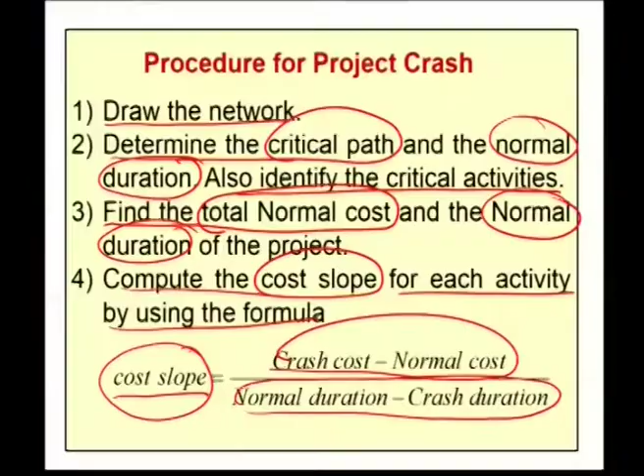The next step is compute the cost slope for each activity using the formula: cost slope equals crash cost minus normal cost, divided by normal duration minus crash duration. The next step is crash the critical activities of least cost slope first, to the maximum extent possible, so that the project duration is really reduced.

Once we identify the cost slope of each activity, we have to crash the critical activity which has the least cost slope to the maximum extent possible. The next step is calculate the new direct cost by cumulatively adding the cost of crashing to the current direct cost. Therefore, the total cost is new direct cost plus the current indirect cost. When the critical activities are crashed and the duration is reduced, other paths may also become critical.

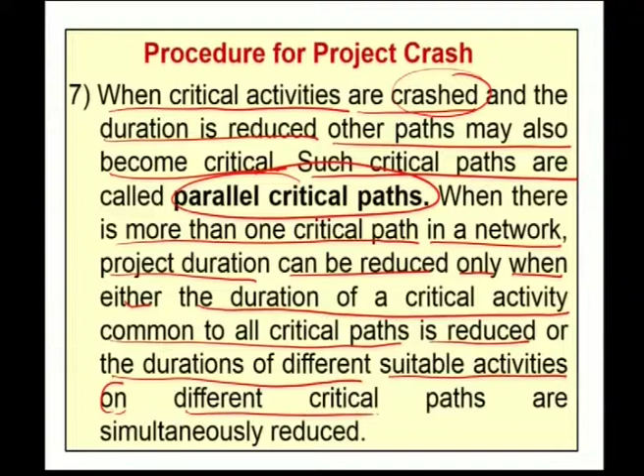So, in the process, when we crash one activity in a critical path, the other path may also become critical. Such critical paths are called parallel critical paths. When there is more than one critical path in a network, project duration can be reduced only when either the duration of the critical activity common to all critical paths is reduced or the durations of different suitable activities on different critical paths are simultaneously reduced.

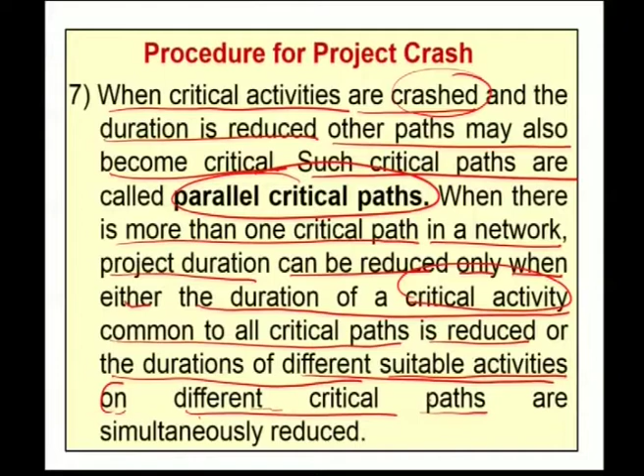So, whenever there is a parallel critical path, there are two ways we can crash the critical activity. One is, if any critical activity is common to the critical paths, then crash that activity. In the other case, we have to crash different suitable activities on different critical paths simultaneously. The final step in this procedure is to stop the process when the total cost is minimum. This gives the optimum schedule, called optimum duration or least cost duration.

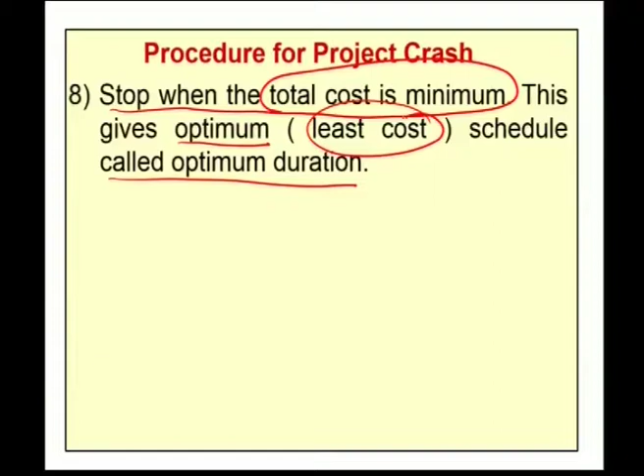So, by applying this procedure for project crashing, now we can solve a problem. The following data pertains to a project with normal time and crash time. There are jobs, activities 1-2, 1-3, 2-4, 2-5, 3-4, 4-5. For each activity, a normal time and normal cost are given, and a crash time and crash cost are given. So, the data involving jobs and their normal time, normal cost, crash time and crash cost is given.

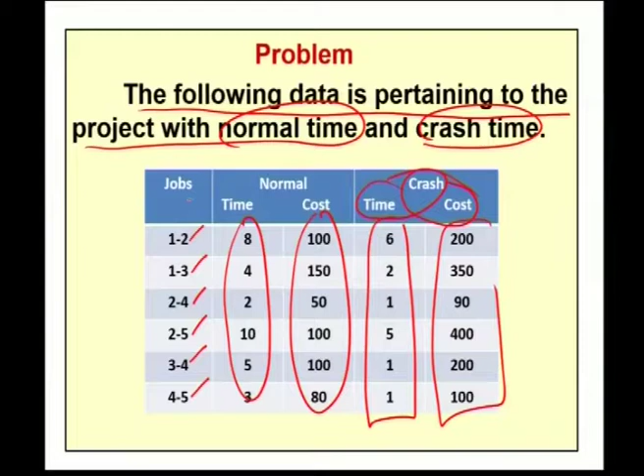Now, the question is, if the indirect cost is rupees 100 per day, find the least cost schedule, that is, find the optimum duration. The next question is, what is the minimum duration? So, a project in terms of activities whose normal time and normal cost, crash time and crash cost is given, and the indirect cost of 100 per day is given. With this, we are interested in finding the least cost schedule, that is optimum duration. We are also interested in finding the minimum duration.

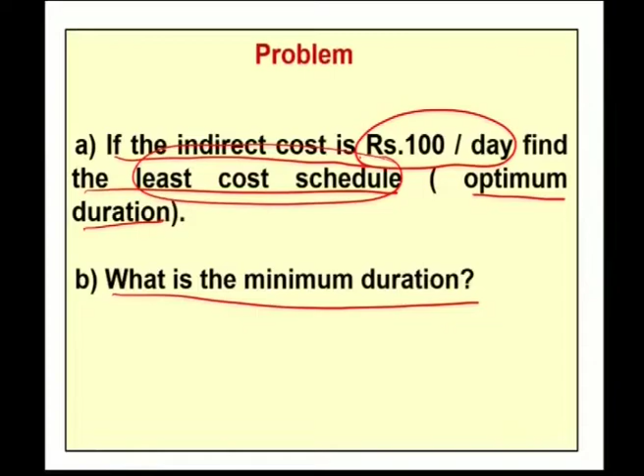Now, in order to obtain the least cost schedule or optimum duration, our first aim is to construct a network for the given problem. There is activity 1 to 3, activity 1 to 2, then 3 to 4, 2 to 4, then 2 to 5 and 4 to 5. By representing all these activities, we get the corresponding network, in which activity 1 to 3 takes 4 days, activity 1 to 2 takes 8 days, activity 3 to 4 takes 5 days, activity 2 to 4 takes 2 days, activity 2 to 5 takes 10 days and activity 4 to 5 takes 3 days.

From this, in order to obtain the critical path, for each and every node we have to compute the earliest starting time and latest finishing time. For node 1, the earliest starting time is 0 because the starting time of the project is 0. For node 3, the E value will be 4, and for node 2, the earliest starting time is 8, because node 2 has only one incoming activity, 1 to 2, which is 8. For node 4 there are two incoming activities, 3 to 4 and 2 to 4, so the earliest starting time is the maximum, 8 plus 2, 10. For the final node, using the similar technique, the earliest starting time is 8 plus 10, 18.

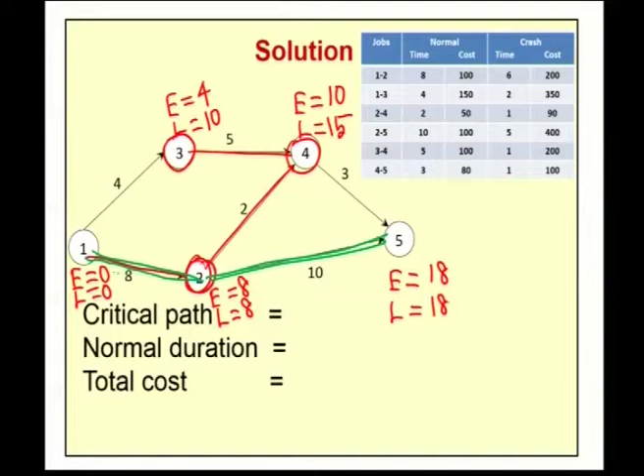The critical path is path 1 to 2 and 2 to 5, which takes 8 plus 10, 18 days. So for this problem, the critical path is 1 to 2 and 2 to 5, and the normal duration is 18 days.

Once we obtain the critical path for this problem, now we can find the total cost. Total cost is indirect cost plus direct cost. Now for this problem, the normal duration is 18 days. Per day the indirect cost is 100. Therefore indirect cost is 18 times 100, plus the direct cost is nothing but the total normal cost.

If we sum all this normal cost, the sum will be 580. Therefore the direct cost is 580. Therefore the total cost is 1800 plus 580, which is 2380. So rupees 2380 is the total cost for this problem. Now once we obtain the total cost for this problem, now we have to crash the critical activity.

In order to crash the critical activity, first our aim is we have to compute the cost slope for each and every activity. We know very well the cost slope formula is crash cost minus normal cost divided by normal duration minus crash duration. Now for the activity 1, 2, we try to compute the cost slope. For the activity 1, 2, the crash cost is 200, normal cost is 100.

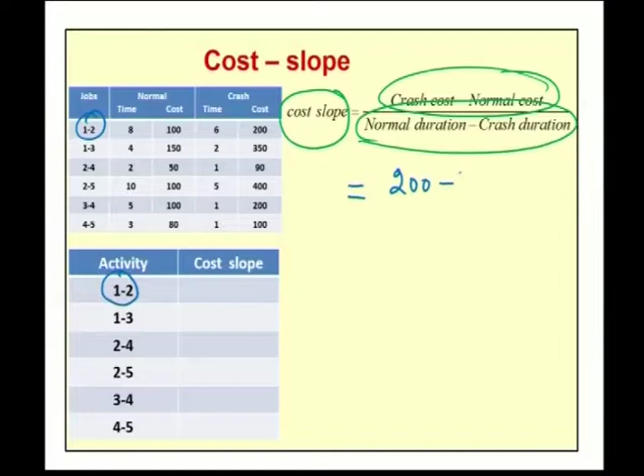So for the activity 1, 2, the cost slope is crash cost 200 minus normal cost 100 divided by, for the activity 1, 2, the normal duration is 8 days and the crash duration is 6 days. Therefore it is 8 minus 6. Therefore 100 by 2, which is 50. Therefore the cost slope for the activity 1, 2 is 50.

Next for the activity 1, 3, the cost slope is crash cost, which is 350, minus the normal cost, which is 150. So for the activity 1, 3, the cost slope is 350 minus 150 by the normal time, which is 4, minus the crash time, which is 2. So 4 minus 2. So which is 200 by 2, which is 100. So in the similar way, for each and every activity we can compute the cost slope.

Proceeding similarly, the cost slope for each and every activity. For the activity 1, 2, it is 50. For the activity 1, 3, it is 100. For the activity 2, 4, it is 40. For the activity 2, 5, it is 60. For the activity 3, 4, it is 25. For the final activity, it is 10. So by making use of this formula, we can compute the cost slope for each and every activity.

Once we obtain the cost slope, in order to crash the critical activity, next our aim is we have to look into the critical activity alone. In this problem, the critical activity is the activity 1, 2 and the activity 2, 5. Since our critical path is 1 to 2 and 2 to 5, the critical activity is 1, 2 and 2, 5. Among these two critical activities, the least cost slope value corresponds to 1, 2, which is 50.

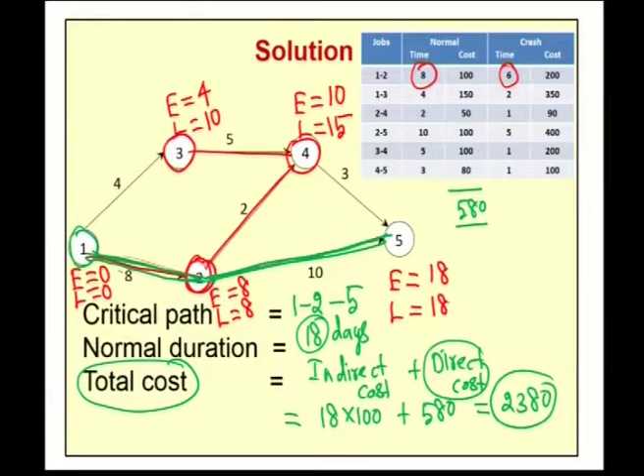From this, it is clear that now we have to crash this activity 1, 2 by 2 days. So, the activity 1, 2 should be crashed by 2 days. So, if we crash that activity 1, 2 by 2 days, then the activity 1, 2 assumes the normal duration as 8 minus 2, which is 6. Therefore, by crashing the activity 1, 2 by 2 days, we have the critical path 1 to 2 and 2 to 5. So, the critical path in the first stage is 1 to 2 and 2 to 5.

So, this is our current critical path for this stage. Therefore, the current critical path is 1 to 2, 2 to 5. Since we crashed the activity 1 to 2 by 2 days, now the normal duration for 1 to 2 is 6. Therefore, the current duration is 6 plus 10. Therefore, 16 is the current duration.

Now, the current total cost: the indirect cost is 16 days at 100 rupees per day, therefore 16 into 100. The earlier cost is 580, plus, since we crashed the activity 1, 2, the cost slope for the activity 1, 2 is 50. Therefore, the direct cost is 2 into 50. Therefore, the current total cost is 1600 plus 580 plus 100, which gives us 2280. So, by crashing this activity 1 to 2 by 2 days, the current total cost will be 2280. Next, we have to crash the activity 2, 5.

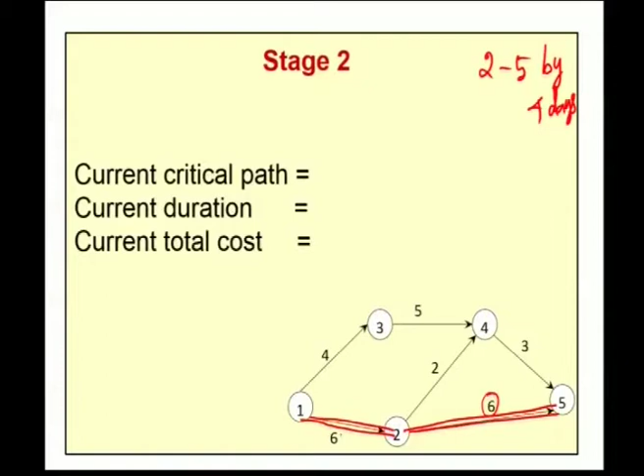In the next step, we crash the activity 2, 5 by 4 days. Then the activity 2, 5, which originally took 10 days, now becomes 10 minus 4, 6 days. In this crashing, the critical activities 1 to 2 plus 2 to 5 take 6 plus 6, 12 days. The path 1 to 3, 3 to 4 and 4 to 5 also takes 12 days, 4 plus 5 plus 3.

Therefore, as far as this stage is concerned, we have two critical paths. One critical path is 1 to 2 and 2 to 5. Another critical path is 1 to 3, 3 to 4 and 4 to 5. In both critical paths, the normal time is 6 plus 6 for the path 1 to 5, and 4 plus 5 plus 3 for the path 1, 3, 3, 4, 4, 5, which is 12 days. Therefore, the current duration is 12 days.

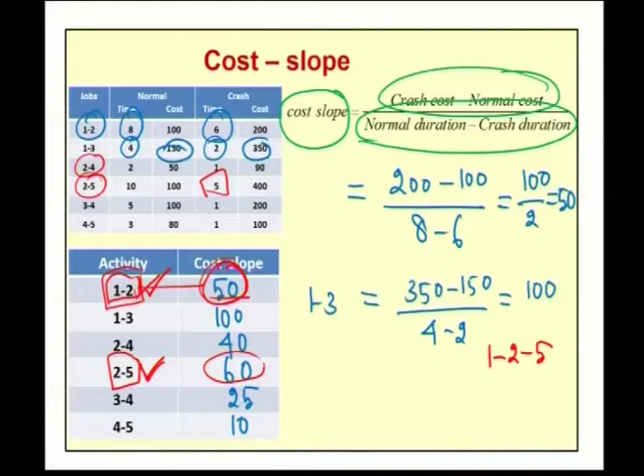Now, the current total cost: the indirect cost is 12 into 100, plus 680. We crashed the activity 2 to 5 by 4 days, therefore the direct cost will be 4 into the corresponding cost slope. For the activity 2, 5, the cost slope is 60, so the direct cost is 4 into 60, which is 240. Therefore, the current total cost at this stage is 1200 plus 680 plus 240, which is 2120. So, rupees 2120 is the current total cost in stage 2.

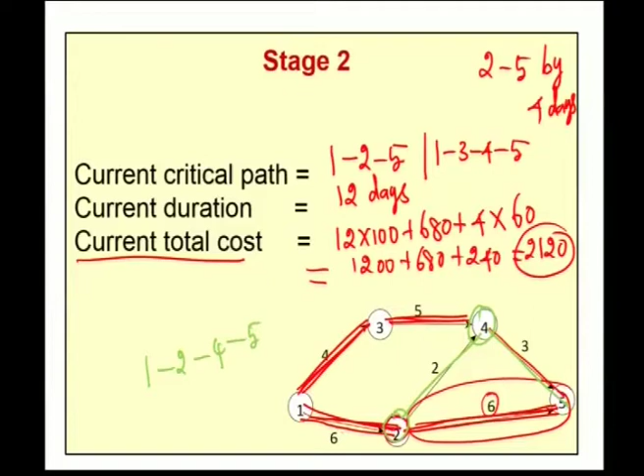In the next stage, which critical activity should we crash? That is the question. One critical path is 1 to 2, 2 to 5. Another is 1 to 3, 3 to 4 and 4 to 5. Now, if we consider the path 1 to 2, 2 to 4 and 4 to 5, it has 6 plus 2 plus 3, which is 11 days.

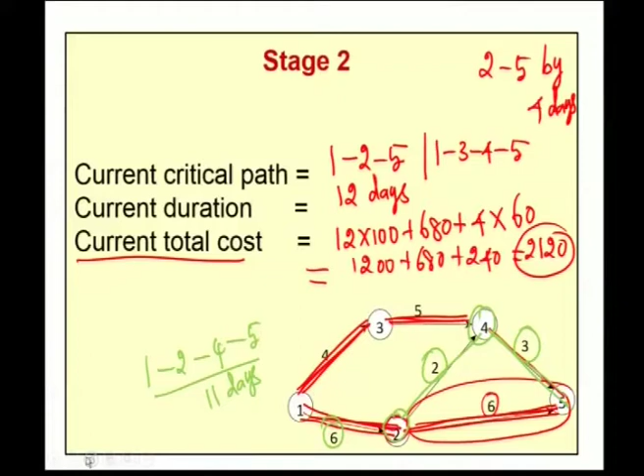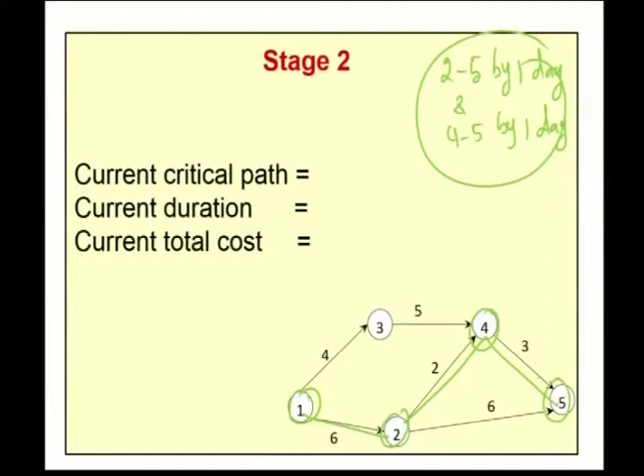Now, we have to crash the activity 2, 5 by 1 day and 4, 5 by 1 day. Since the path 1 to 2, 2 to 4 and 4 to 5 has 11 days, we have to crash the activity 2 to 5 by 1 day.

We have to crash the activity 2 to 5 by 1 day and crash the activity 4 to 5 by 1 day. So, if we crash 2 to 5 by 1 day and 4 to 5 by 1 day, the critical activities will be 1 to 2 and 2 to 5. So, 1 to 2 and 2 to 5, which assumes 6 plus 5, 11 days.

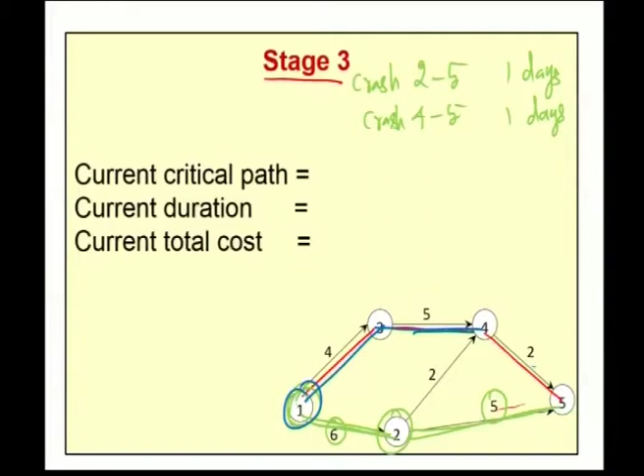Another critical path is 1 to 3, 3 to 4 and 4 to 5, which assumes 4 plus 5 plus 2, 9 plus 2, 11 days. Therefore, the current critical path at this stage is 1 to 2, 2 to 5. Another critical path is 1 to 3, 3 to 4 and 4 to 5, which assumes 11 days. Therefore, current duration is 11 days.

Now, the current total cost is indirect cost, which is 11 into 100, because per day the indirect cost is 100, plus 920. Now, at this stage we are crashing the activity 2-5 by 1 day. Therefore, 1 into the corresponding cost slope for 2-5, which is 60, and we are crashing the activity 4-5 by 1 day. The corresponding cost slope is 10.

Therefore, 1 into 10. Therefore, the current total cost is 11 into 100, which corresponds to the indirect cost, plus 920, and the direct cost is 1 into 60 for activity 2-5 plus 1 into 10 for activity 4-5, which gives us a cost of 2090. Therefore, the current total cost for this problem is 2090.

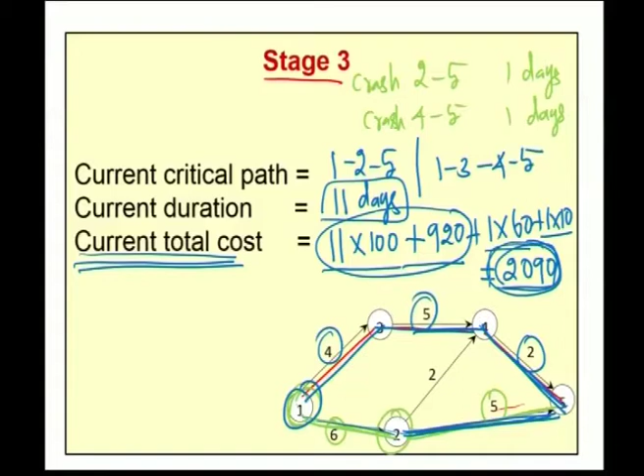Now, in this problem, we are crashing all the critical activities. Hereafter, we cannot crash any activity. Therefore, the optimum duration for this problem is 11 days and the cost will be 2090. Now, this crash scheduling will be tabulated here. We have 4 stages. At the very beginning stage, we are not doing any crashing.

The current duration is 18 days. The direct cost will be the total normal cost, which is 580. The indirect cost: the current duration is 18, per day 100 rupees. Therefore, 18 into 100, 1800. Therefore, total cost is the sum of direct cost plus indirect cost, which is 2380 rupees.

In stage 1, we are crashing the critical activity 1-2 by 2 days. Therefore, the current duration becomes 16 days, the direct cost will be 680 and the corresponding indirect cost will be 16 into 100, which is 1600. Now, the sum of these two values will give us 2280.

In stage 2, we are crashing the critical activity 2-5 by 4 days. Therefore, the current duration will become 12 days. For this stage, the direct cost will be 920 and the indirect cost will be 12 into 100, which is 1200. The sum of these two values gives a total cost of 2120.

In stage 3, we are crashing 2-5 by 1 day and activity 4-5 by 1 day. Therefore, the current duration becomes 11 days. For 11 days, the indirect cost will be 11 into 100, 1100. Now, the direct cost will be 990. If we sum these two values, the total cost will be 2090.

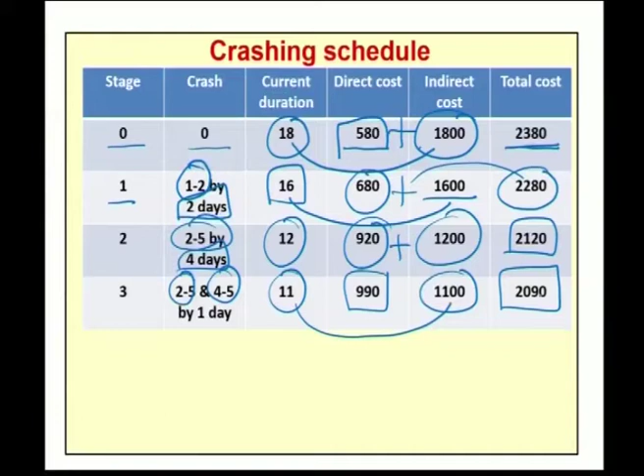Therefore, the given project has the optimum duration as 11 days, and it has the least cost value, which is 2090. For this problem, the minimum duration is also 11 days. The minimum duration and the optimum duration coincide. So, optimum duration is 11 days, minimum duration is 11 days, and the least cost value will be 2090.

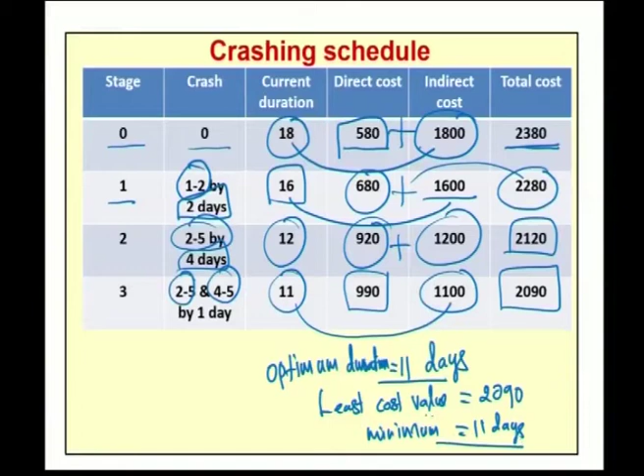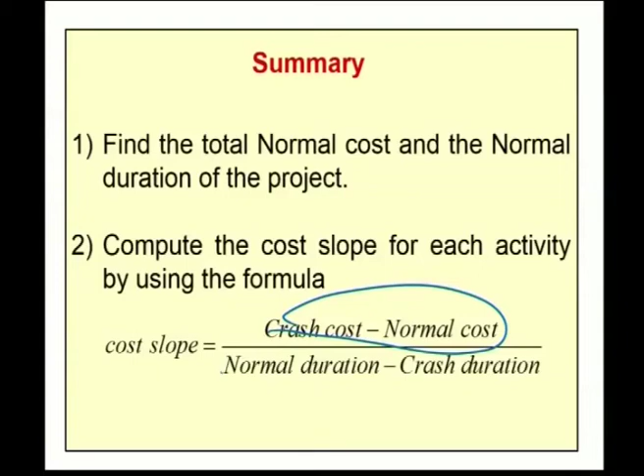In project crashing, the first step is, by obtaining the network, we have to calculate the critical path. Once we obtain the critical path, next we have to compute the cost slope for each and every activity using the formula cost slope equals crash cost minus normal cost divided by normal duration minus crash duration. Once we obtain the cost slope, we have to crash the least cost slope first and to the maximum extent possible, so that the project duration is really reduced.

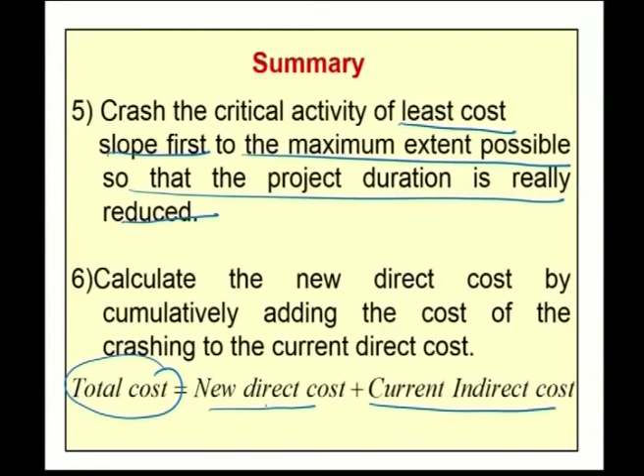Once we do these things, next we have to compute the total cost, which is the new direct cost plus current indirect cost. Now, if we do this process, we will get the least cost value.